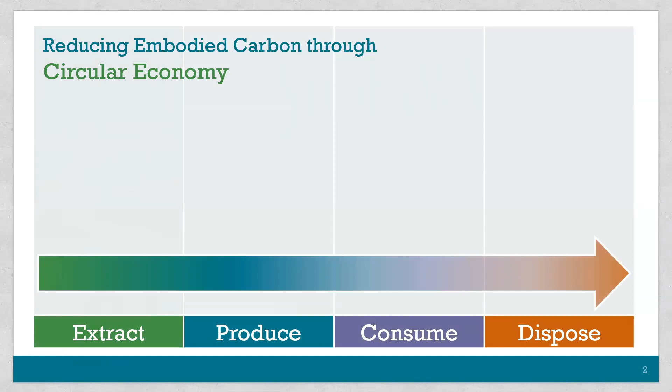So, move my slides. Okay. In a linear economy of take, make, use, and waste, where we're extracting materials, building with them, operating the buildings, and demolishing at end of life, there are carbon emissions all along the lifetime. When we recycle materials, we cut off the phases of demolishing downstream and extraction to some extent upstream. And here we see some avoided embodied carbon emissions.

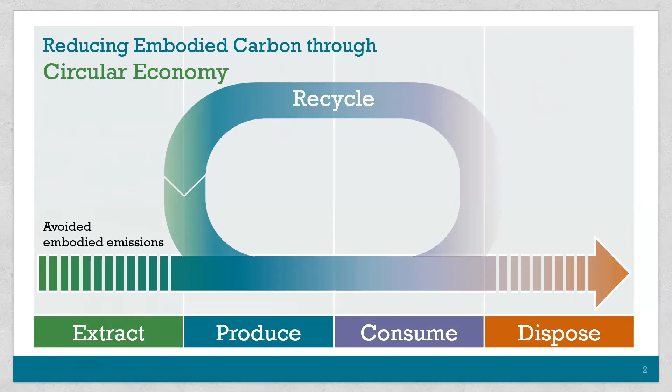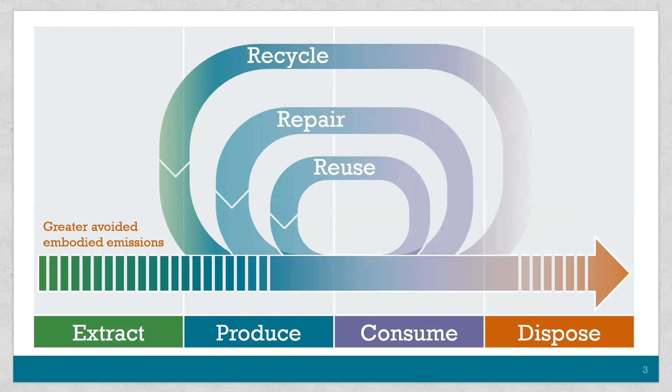In circularity and generally materials management, we talk about higher and better use of materials, keeping them as intact and at their highest economic value as possible. So this means in this diagram, going inward on the concentric circles to repair and reuse. And when we repair or reuse a product without breaking it down into its basic material components for recycling, we see even greater avoided embodied carbon emissions because we avoid some of the production phase of the life cycle emissions. So there is a nexus between circular economy and embodied carbon. The solutions are not always compatible, but there is a lot of overlap.

So I would encourage anyone that's interested in circular economy to really check out the Ellen MacArthur Foundation. They're a global leader, a thought leader in this, and we've been members of their Circular Economy 100 group for 3 years. Here's an example of a resource from the Circular Economy in Cities toolkit. And I'll be pointing out some of these drivers for change that are creating the necessity for circular economy in the built environment as we go through some of these slides.

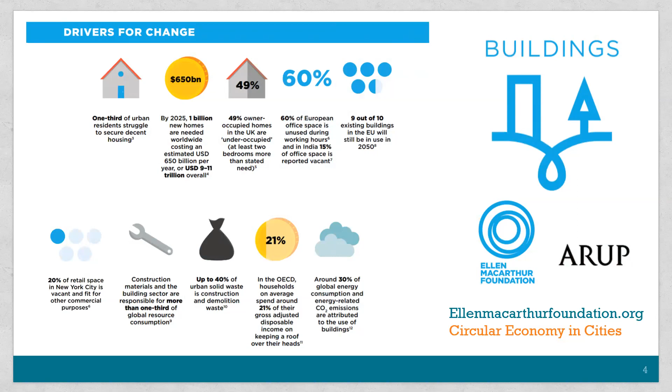So let's look at the transition from today's building material flow to what a more circular material flow might look like. So this is what we have today, basically. The large band across the bottom being mainly a linear throughput of materials, with the loops above representing an effort for C&D recycling and some building renovations that occur naturally.

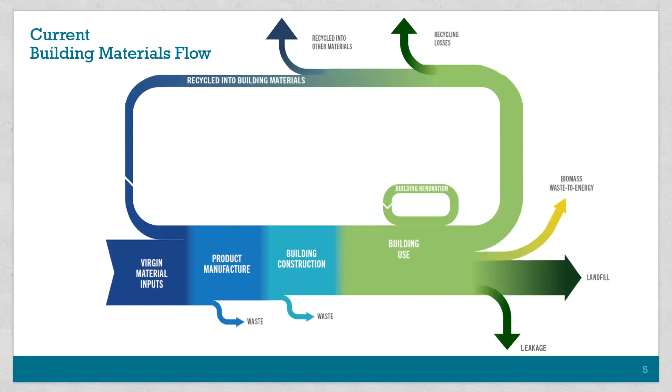Increasing circularity in the built environment means creating more loops and making them thicker, putting more material through those loops. So at the material level, more effective recycling, and moving inward on the circles, disassembling parts for repurposing, refurbishing, modifying to use almost wholly intact, and closer in is salvaging for direct reuse, and also placing a greater emphasis on building renovation and upgrades. Again, with the tighter loops resulting in greater embodied carbon savings by avoiding more processing, manufacturing, and transport.

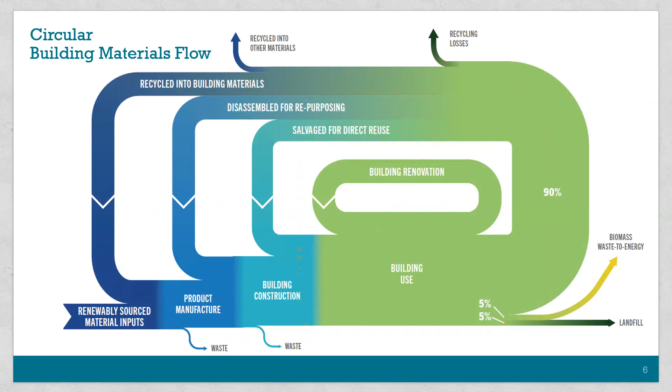So we and our partners at ARUP produced a primer on circularity concepts geared towards local governments, which can also be a good, simple introduction for anyone interested in looking at circularity in the built environment. And in it, we looked at these varying scales at which materials can be reused or used more efficiently. And at each scale, we looked at strategies for A, making the most of what's already existing in the built environment, and B, for designing new construction. First, for material efficiency, which would also reduce upfront embodied carbon, and also for optimal chances at reuse at the building or part's end of life.

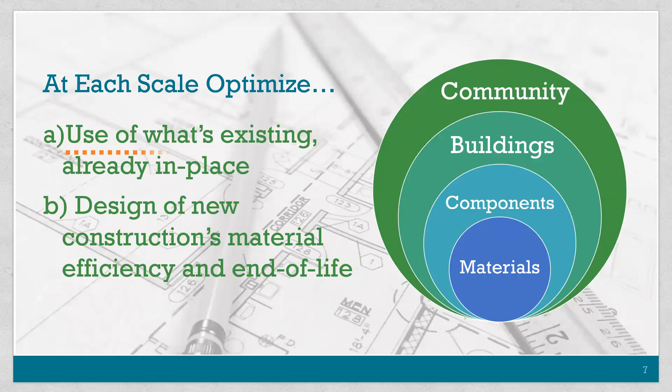This last point, designing for disassembly and a second or third life, does reduce embodied carbon, but in the future, potentially decades from now. So with our immediate focus on embodied carbon now, we're going to limit our conversation today to the first point, using what's already in place.

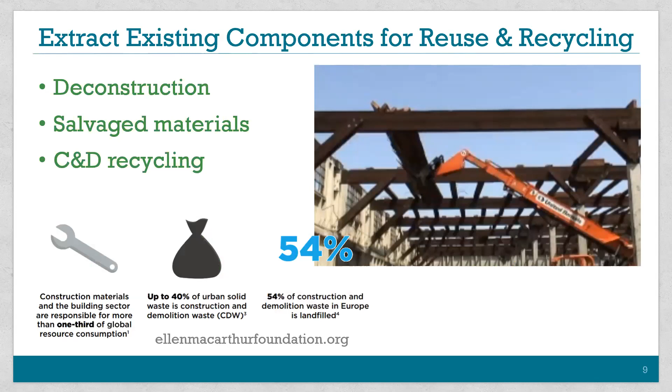So Joe and Andrew will be talking about this scale of reuse today. And then keeping as many of those parts and components intact in the building and extending the life of those parts by reusing the whole building is the next scale of reuse.

At the whole building level, getting the most out of existing buildings can include sharing and increasing occupancy rates of currently underutilized buildings. So some of these statistics we saw from the Ellen MacArthur Foundation report show that there is significant underutilization of existing buildings.

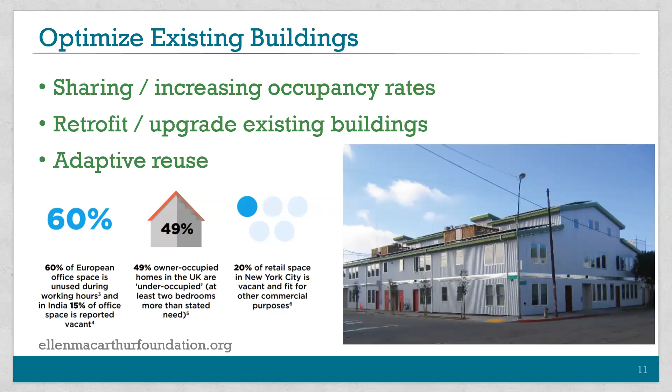And then taking those older buildings and retrofitting them and upgrading them to improve their performance, and also adaptive reuse of existing buildings if the programming of that space needs to change. So this is an example of an old noodle factory turned into affordable multifamily housing here in Oakland. And Larry will be talking about this scale, the building scale of reuse today.

And finally, no building is an island, and especially local governments need to consider how all of the existing buildings and new construction serves the end goals of housing people and jobs at the community scale. And this awareness should also apply to developers and anyone who's really building in a community. How does the placement of individual buildings of what height, type, and building materials affect the overall community's carbon emissions, both operational and embodied carbon?

So this is a question that we at StopWaste are helping cities in the Bay Area start to ask, maybe not yet answer. We're doing this through an interactive planning charrette game. We'll be playing this at the Getting to Zero conference in Oakland on October 11th, and I'm happy to talk about that offline some more.

But some common strategies that are already used to optimize the use of existing city infrastructure and the existing built environment into which a building is added are things like infill development, efficient use of spaces, smaller units, while being careful not to compromise quality of life or cater to a very small segment of demographics. So it's a little bit tricky and you need local government intervention there probably.

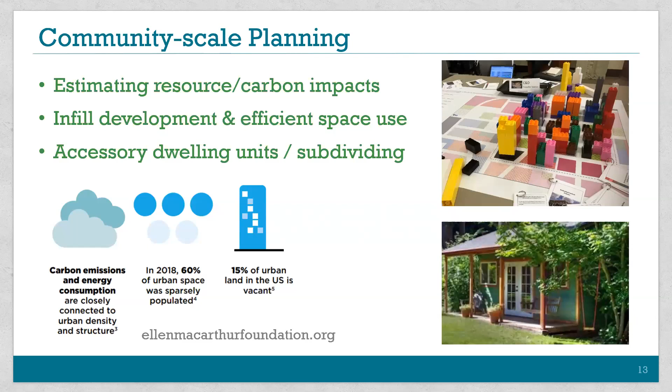But also in the single family space, the emergence and popularity of accessory dwelling units and subdividing larger homes into multiple units. So that's just to set the framework and stage for all of the detailed reuse examples that the rest of the panelists will be speaking about.

And here's a summary of the report that I mentioned that we invite you to use as you like, offer us feedback, but to get the conversation started.

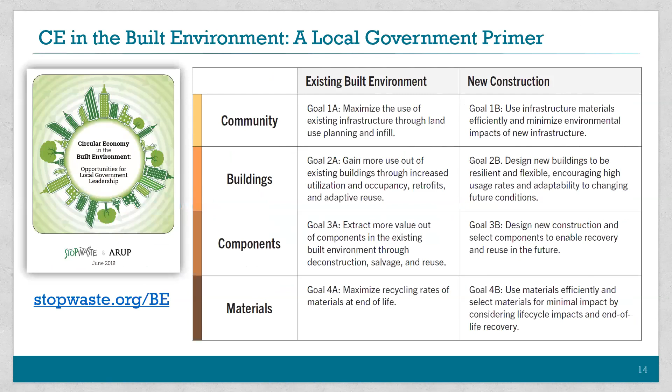Joe has been the executive director of Build Reuse, formerly known as BMRA, which stands for Building Materials Reuse Association, since 2017. Being in the building trades since he was 15 and in reuse nonprofits for the last 20 years, he is a builder at heart.

Since 2000, Joe has been a leader in the reuse industry, first in the Northwest, where he helped launch several local reuse groups in Portland, Oregon, and served on the City of Portland's Deconstruction Advisory Group to pass the nation's first deconstruction ordinance. Then nationally with Habitat for Humanity through his work on the National ReStore Committee.

Joe helped build the Portland Habitat ReStores into one of the nation's top 5 ReStores in revenue and net profit. Since joining the BMRA, he has been revising and refocusing the organization to align building reuse with other industries in the sustainable materials management industry and continue to heighten the awareness of reuse and deconstruction.

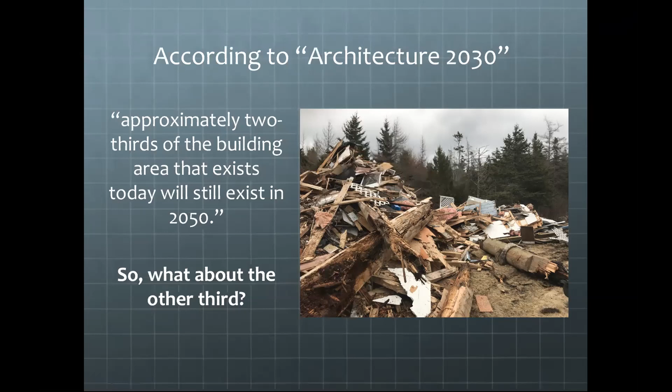According to Architecture 2030, we have a lot of buildings that are going to be coming down over the next 30, 40 years, 1/3 of them. So my big question there is, what about the other third? And what happens when we take these buildings down? We're also hearing that the global building stock is going to double in area by 2060.

This is the equivalent of adding an entire New York City every month for 40 years.

So we've come a long way. It's always a good reminder to me of, one, where we've come from, and two, how much more we have to do. But my basic question here, and I'm preaching to the choir, is where will all of these materials come from?

They're going to come from natural resources if they're not reused. There's an incredible amount of wealth in the material values within our buildings that are going to be coming down. If we destroy those materials, they go to waste, and we take new natural resources.

The key there is the wealth in the present materials, and that's where the community aspect, in my mind, comes in. Because as we destroy that wealth, as we waste that material, we are depriving our communities of that inherent embodied wealth that's within those materials.

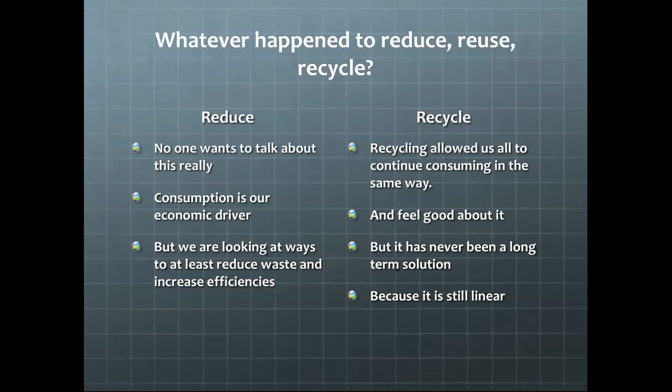Now, what about that reuse component in buildings? Why is this important? I think it goes back - I forgot to start my timer, Mia, so cut me off if need be - to the communities, and why it's important.

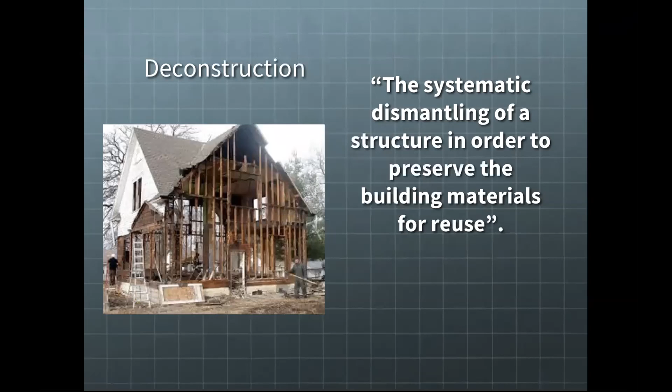Deconstruction is the systematic dismantling of buildings to preserve materials for reuse. Where those materials go is the important part from a community point of view - they come back into the community and create jobs. Deconstruction creates 7 jobs for every 1 job in demolition, and those jobs are typically entry-level positions.

A lot of the people that start in those jobs, like you see in this slide, can go on to other jobs within construction. I like to use the phrase that if you know how to take a building apart, that's a really good intro to putting a building together.

We usually look at it the other way, but this group of folks came to us, came to our trainings, with no experience. They're taught how to take a building apart, and by the time they get a couple years of experience, they can get work in other trades. So it's a very good entry-level position.

So job creation is a huge factor for a lot of communities. When you're looking especially at blighted communities, as buildings are coming down and being destroyed and that material is being wasted, there could be 7 more jobs created for every 1 job tearing those buildings down, especially in blighted communities where there are underserved populations that need employment.

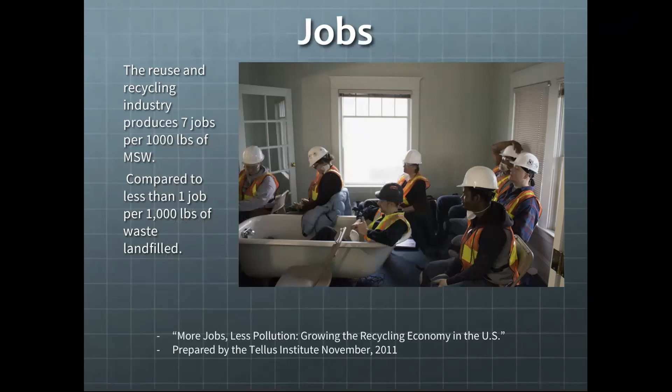It's a huge waste. These workers will be working within their community to take those resources back into the community, typically into reuse centers - that's where most of the materials go. They also go to higher-end material reuses, but a lot of the materials that get reused into the system go through local community centers like this one. It's unmeasured, the thousands of jobs created through that. The stores in Portland that I worked with had 70 employees working in 4 stores.

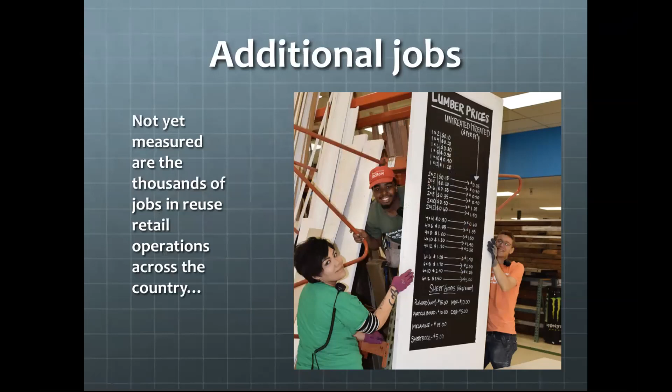And that's just one small city. The potential for creating reuse centers is immeasurable right now. The more buildings come down, the more materials are reused and focused through these reuse centers, the more jobs we can create, to the benefit of our communities. The other advantage with those materials is that most of these reuse centers support needs-based people in the communities who are able to buy these materials at serious discounts to repair and rehabilitate their homes. So there's a huge benefit there as well.

So what's up in our industry as we talk about deconstruction and reuse? It's amazing. When I started this work 15 years ago, the words were unheard. There was no conversation around it. Now we're talking with cities, and this is just a short list of the cities we're talking with now, but communities everywhere are starting to look at deconstruction and reuse as tools for community development within their city. Ways to address blight, economic gentrification, weatherization issues - different topics like that are being addressed through embracing deconstruction and reuse to get those materials and that material wealth back into the communities.

We've got some challenges, I'll just spend a second here. We're a small industry, where recycling was 25 years ago. We need to grow, we need to expand. The systems that allowed recycling to grow exponentially the way it did, and with the speed in which it did, was because it was able to still work on that linear model that Mia outlined earlier. Reuse is a much tighter circular system, and it's going to require different systems. So as you look at that within your communities, within your businesses, you have to look at models and systems that will move larger amounts of larger materials. How we do that effectively is the key challenge to our industry right now.

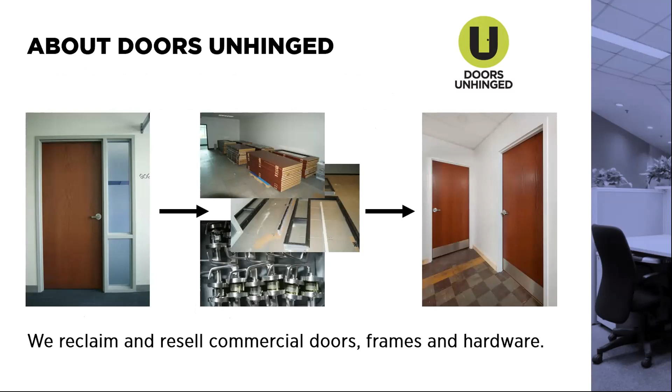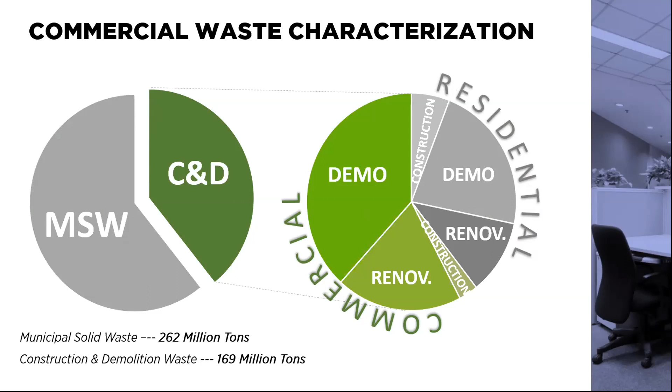And so renovation is going to be materials that are coming out of buildings without the building coming down. So that's when an office space gets turned over and all the materials get taken out to the dumpster and tossed in a landfill. That 32 million tons is, to us, our golden opportunity. Whereas something like core shell waste often is going to consist of concrete, masonry, steel, brick, glass, what have you, some roofing maybe. Those items are really, in a lot of ways, better suited for recycling, just in the nature of being able to take things apart and put them back together.

I think there is some great reuse happening, and I love some of the slides that Mia was showing of systematically seeing structural steel being taken down. I think that's awesome. Sometimes these buildings are so old they can be obsolete.

However, the tenant waste, or commercial interior waste, however you want to look at it, is a different story. These materials often come out after the build out could be as little as 3 or 5 years, but often around 15 years. Sometimes they're brand new. They tend to go into the building as modular individual pieces, not necessarily highly customized, pretty standardized in their construction and how they're produced. And I'd argue a lot of the materials coming out are going to look a lot like the materials going into the next project. So what a great opportunity we have to really close this loop.

To me, there's so much potential here, and this is why I launched a business in this space. To us, commercial material reuse is really taking materials out of commercial buildings and putting them back into commercial buildings.

A lot of talk these days is about construction waste management and zero waste, and that's great, but it's not talking about where those materials end up. And if they end up in some mixed recycling stream, I'm less fond of that. I think there's a lot of benefit, as Mia and Joe have spoken to, about reusing those materials and tightening that circle in that loop.

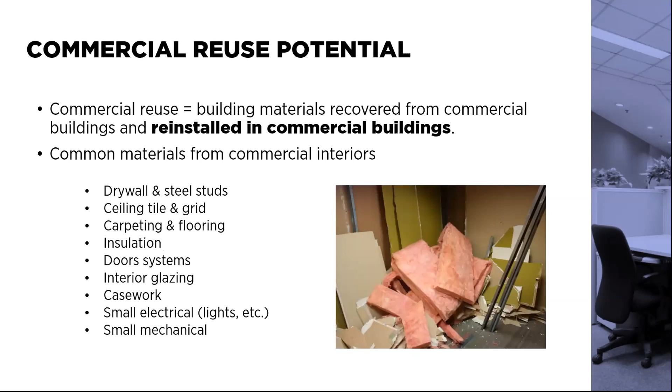These are some common materials you would see in commercial interior projects. The majority of the waste is going to come out of drywall and steel studs, followed by ceiling tile, carpeting, and it goes down the list. Door systems are in there too. A lot of these materials, again, are highly reusable and, in my opinion, highly valuable.

Looking at the carbon side of this, I first want to thank the Carbon Leadership Forum and all the people that helped out with their really formative studies: the benchmark study that looked at the whole building life cycle assessment and the embodied carbon within that, and then the subsequent studies for tenant interiors and for mechanical, electrical, and plumbing. This is great work, and we've crunched this data a little bit.

When a building is initially built, you're going to see that the majority of the embodied carbon rests in the core and shell, and that makes a lot of sense. However, tenant spaces turn over much more regularly than the whole building. So over time, as renovations happen, your carbon is starting to pile up. And naturally, so are the materials, right? We're tearing all those materials out, throwing them in the landfill, getting new materials and bringing them in.

So by the end of the lifetime, these numbers are very approximated in a lot of ways, but we're seeing that the interiors actually provide pretty stiff competition for the embodied carbon as compared to the core and shell.

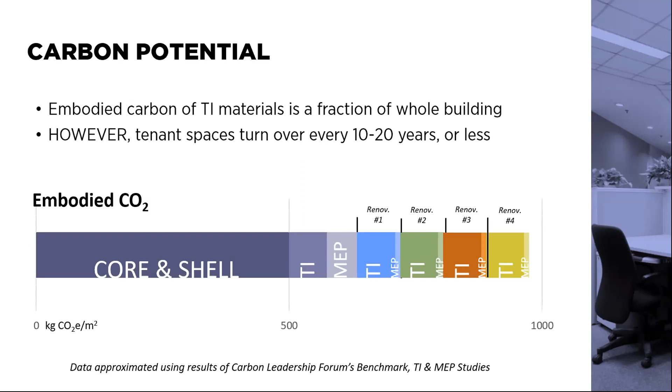Looking at this another way, we took the data out of the Carbon Leadership Forum's tenant interior study and really wanted to understand how widespread certain materials were, trying to identify what the best candidates are for reuse if we wanted to maximize the embodied carbon we're capturing back.

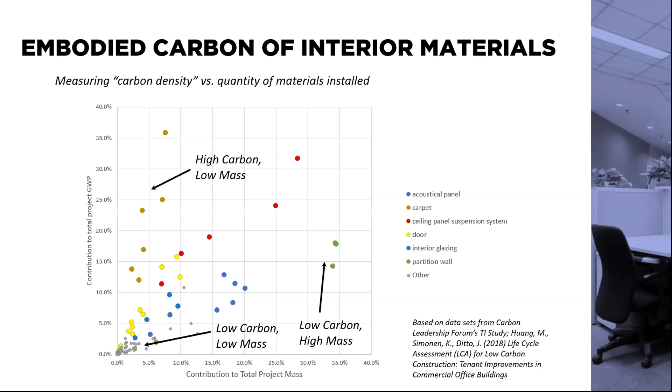So this has been the basis for how we're thinking about this. If we do go look at it pound for pound, and go through various materials, I've still stuck with a lot of the same materials, and you understand my bent towards doors. So there are a lot of materials geared towards doors in here.

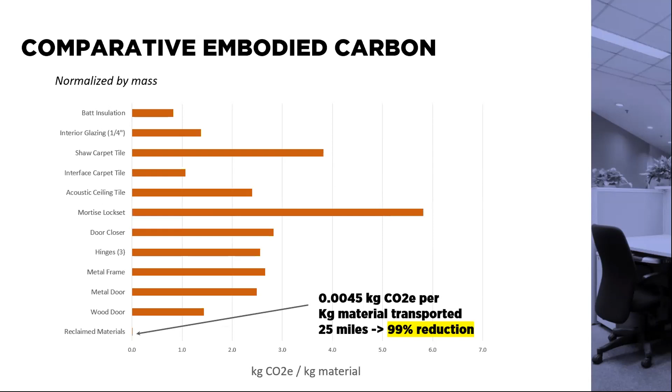If we compare that to a reclaimed material, pound for pound, reclaimed wins every single time, right? Over 99% reduction in embodied carbon, which makes sense, right? Because all we're doing is taking it out of the building, putting it on a truck, and sending it to a warehouse, hopefully not that far away. This is comparing essentially just the manufacturing process. If you're a life cycle person, that's LCA, stage A1 through A3. So there's huge carbon benefits from this. I mean, it's extraordinary.

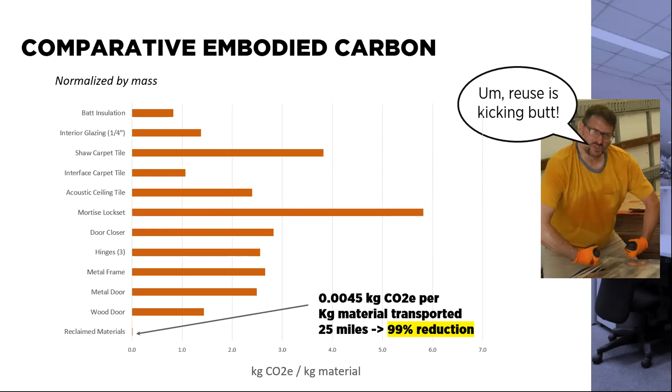Joe mentioned, rightly so, all the great work happening in community reuse centers. We see a lot of that being based around the residential marketplace, where you have homeowners and artists and hobbyists that like to find a really great deal or something so special and unique that came out of a building with a great story around it. That's fantastic stuff, right? And these centers often end up looking kind of like a Home Depot of reused materials, right? Really cool, interesting things you can wander through, throw some things in your cart, check out, and take it home.

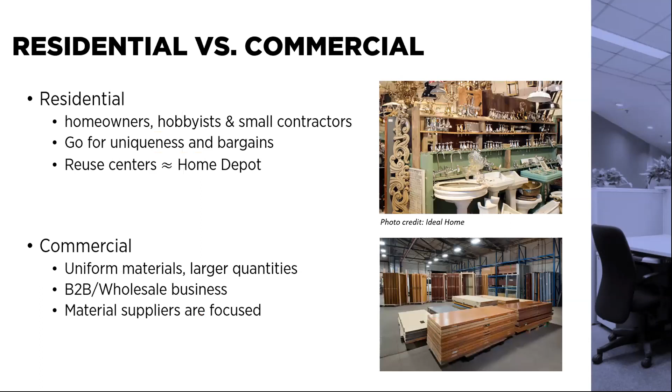That's great. There's so many great centers around the country. We're seeing less work in the commercial space though. Part of that is commercial reuse is going to look very different. We're going to see larger quantities of materials that are very similar. We don't really have that warehouse environment you come in and wander around. It's really more of a wholesale B2B business where we're working with contractors, architects, developers, and maybe tenants to identify which materials can fit into their project. And similar to the way the industry works, material suppliers tend to be very focused. They're not Home Depots supplying drywall and doors and lighting and ceilings. Everyone is a different one. You have a door supplier, a lighting supplier, a flooring supplier, a ceiling supplier. They're very focused and understand their industry really well.

We see a huge amount of opportunity in the commercial reuse sector, which is why we launched Doors Unhinged. There's so much material out there. Again, that 32 million tons coming out every year, which has a lot of economic value still in it. Some of these materials, you wouldn't even know they're used, honestly. The other part of that is new materials going into commercial projects are expensive per square foot. They're much higher than residential. And why that's important is if you have an expensive material, and then you give someone a really good deal on it for buying it reclaimed, you still have a reasonable margin to capture that material and essentially run a business around that. That's the way we can really get a lot of throughput, because we have some decent margin.

These materials, again, are going to be fairly similar. A lot of doors are 3 foot wide by 7 foot tall. Ceiling tiles come in 2 foot squares or 2 by 4. There's a lot of uniformity baked into this whole sector, so we can take advantage of that. Spaces also turn over very quickly, so there's a steady flow of material, and room and also the need to specialize into specific areas or material types.

Challenges, of course there are challenges. There are lots of them. Lots of material that can become a problem. I know firsthand, you open the tap a little bit and it can be like drinking from the fire hose sometimes. There's so much material that can come at you, it can be overwhelming. One of the largest challenges we deal with is working with architects and designers to incorporate reclaimed materials. And oftentimes they just don't necessarily want to move away from the specific design they had, and the very attachment they may have to a specific finish, size, whatever.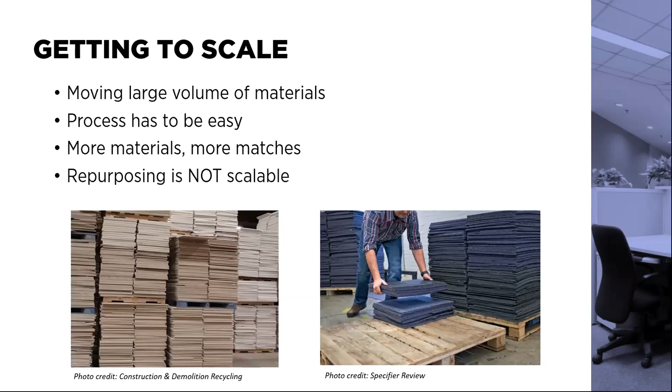All right, so using a little bit of math and that same information from the Carbon Leadership Forum TI study, some data out there says that there's about 400 million square feet of commercial office space built each year. That's interiors, not new, brand new ground-up construction. So here's the ambitious goal I'm setting out: if we hit 50% of the square footage of that new space going in and have them use 50% reclaimed materials, what's the carbon impact of that? You go through all the conversions and the math, and it comes out to almost 21 megatons of CO2 avoided by 2050. And that's just in the US.

We don't have the ability—we know there's a huge amount of space globally, and looking in other areas, we don't have the capability to do those numbers. I'm sure someone can. If you know this, I would love to talk to you.

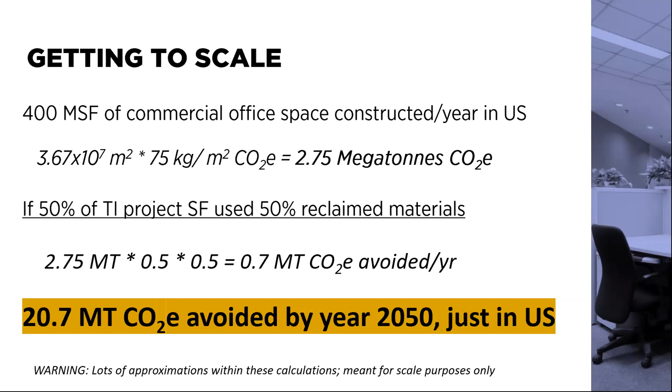So how are we gonna get there? How are we gonna hit 50% material reuse? Okay, well, this is what you'd consider a pretty traditional circular economy approach.

Instead of the linear approach, we're gonna close the loop here and capture those materials. I don't believe on its own this is gonna work, where you just look at the people you get material from behind you and sell the materials to your customers in front of you. There needs to be more than that. Honestly, what we need is a central nervous system—really a platform that allows information to flow about what is where, what's coming out, who's involved, what's gonna happen, how much it's gonna cost.

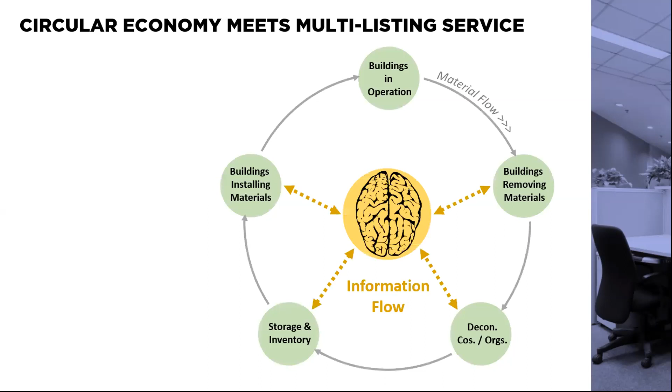All this material, really—what I compare it to is essentially the multi-listing service that real estate brokers use for residential real estate. You have all these competing brokers that share one central platform. The brokers are a key part of this. Imagine all these material reuse brokers working with this platform, working with individual customers, working with decon companies and reuse organizations to make sure you get this material flow that's as efficient as possible and gets the right materials from the people who have materials to the people who are buying materials.

And just think about all of the new enterprises that could pop up, that could build around this platform, all the jobs that are created—as Joe mentioned, how much more we get from a job in deconstruction than we do from a job in landfilling. So that's my pitch.

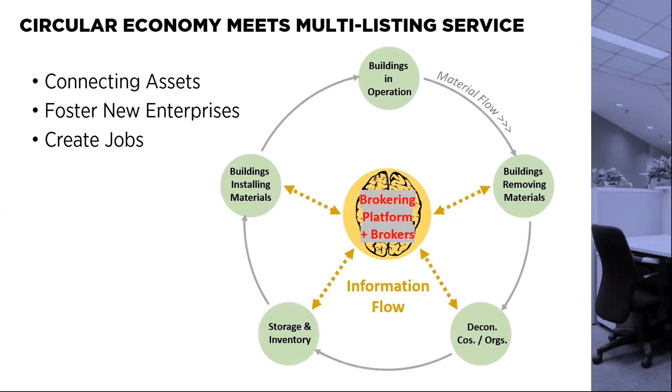Quickly in summary, there's so much material out there. There's legitimate and significant carbon benefits to it. It's a tough industry, but we just think we need to build the right enterprises that reflect how the industry works. And let's get ourselves together and organize the infrastructure to make this all happen.

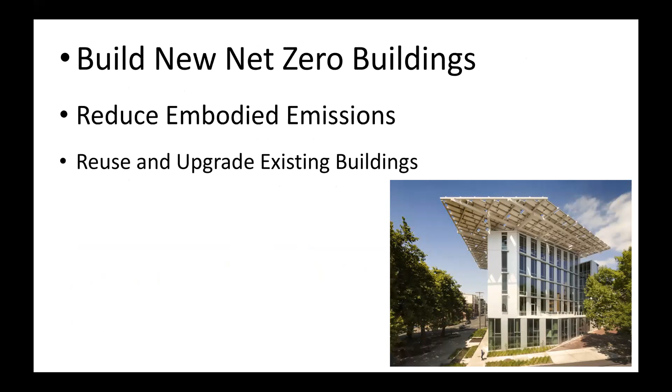And that the use and waste of materials has a huge impact on natural resources, on our communities, and carbon emissions. So I'm going to talk about this at the whole building scale and focus on carbon opportunities of reuse. So this is the way we currently think about getting to zero in the architecture profession. We think about building nice new net zero buildings. We're starting to think about reducing embodied emissions, and we're sort of thinking about reuse and upgrade, but not very seriously. And I think we have it backwards, and I'm going to tell you why.

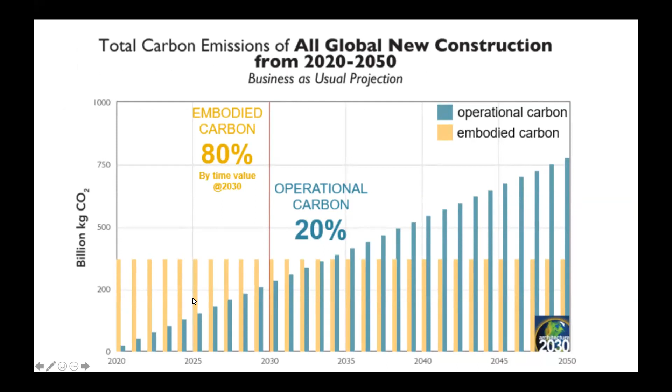So let's start with new buildings. So this is a slide from Architecture 2030 that just sort of shows the impact between now and 2050 of embodied emissions, which are the yellow lines, and the operating emissions, which go up. If we build the same amount every year, which is what we're projected to do, about 80% of emissions from new buildings will be embodied carbon. So with new buildings, we really need to be focusing on the embodied impacts.

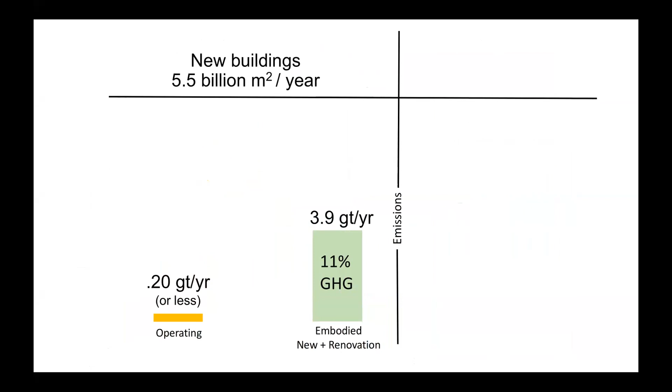All right, so on an annual basis, it looks like this. New buildings, to build them is about 11% of our global emissions. To operate those new buildings is less than 1% of adding operating emissions each year. So embodied emissions are where we need to focus with new construction. But there's another thing, which is that the existing buildings are sitting around emitting about 28% of our greenhouse gas emissions just from operating them all.

So there's a couple of reasons we need to think about existing buildings. One is to not build so many new buildings by reusing more, and two is to try and make them more efficient. So I'm going to go off topic a little bit and talk about operational carbon as well, because I think they really tie together.

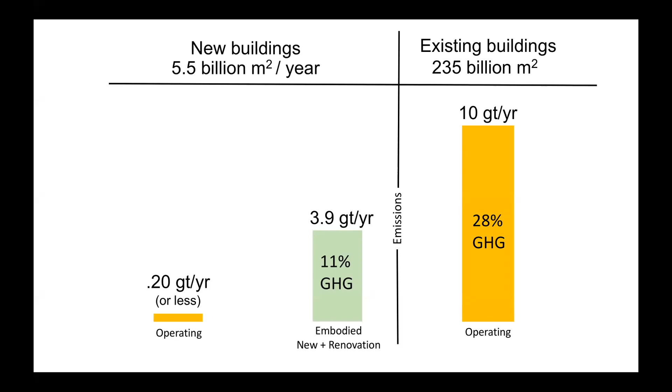So to me, there's this huge opportunity to say, if we could reuse more of the buildings in those countries, we could maybe build fewer new buildings, and both those numbers then come down. We're avoiding embodied emissions by building fewer, and we're upgrading our existing buildings and lowering the carbon of that.

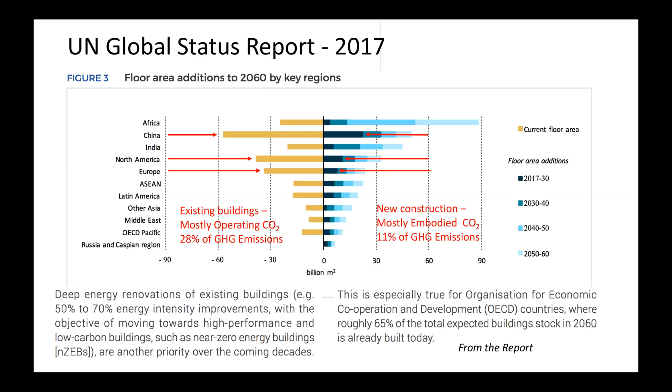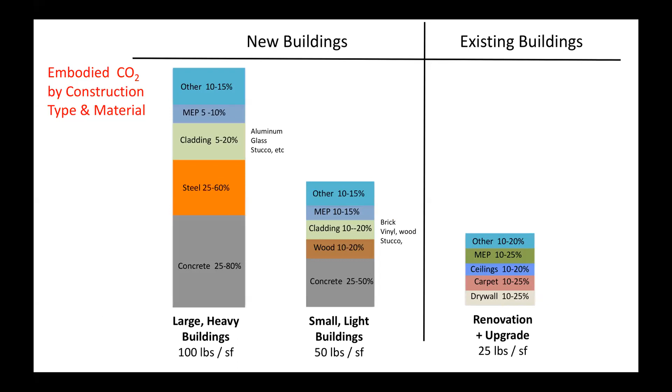But the real savings is when you get into renovating existing buildings, you're going to spend less than a quarter of that typically, because you're not dealing with the foundations and the structural system. You're dealing with interiors, MEP systems, and you're basically taking a building and putting much less investment into embodied carbon. So it's much lower.

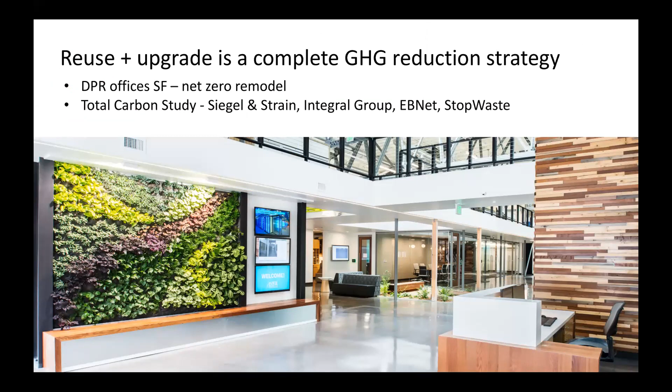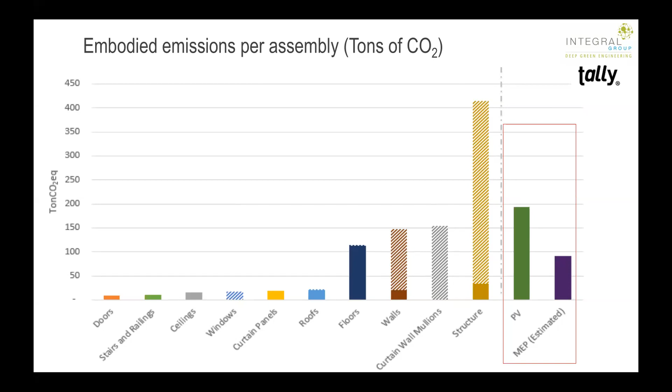And it resulted in about a 70% reduction in CO2 emissions by reusing the building and investing a little bit in the remodel. What this didn't initially do, it didn't count the PVs and the MEP systems, because Tally at that point didn't have that in their database. So we estimated those on our own, and that about doubled our embodied carbon footprint for this remodel. The good news was that those PVs will pay for their carbon debt in about 4 years by making it net zero.

So the bottom line to this slide is that we have to do both: we have to save embodied carbon, and we have to save operational carbon. And if we reuse buildings without doing the energy upgrades, we're missing this huge opportunity.

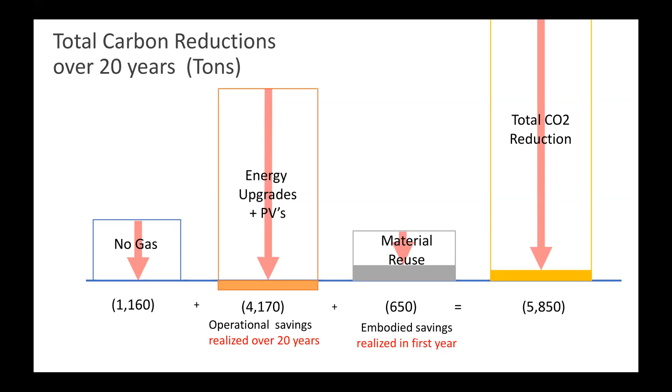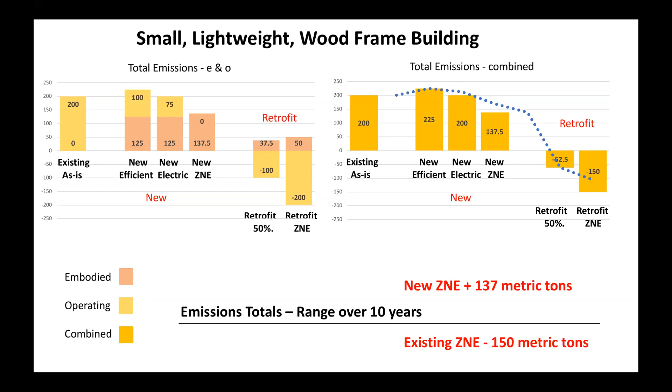So on the right-hand side, you can see the cumulative. When you add these two together, you can go from just building a new efficient building, which is going to be worse than leaving the existing building as it was, all the way down to a retrofit to net zero. You're saving 150 tons of carbon by reusing and retrofitting that building. So there's opportunities both from embodied carbon and from operational carbon. This is a lightweight wood building.

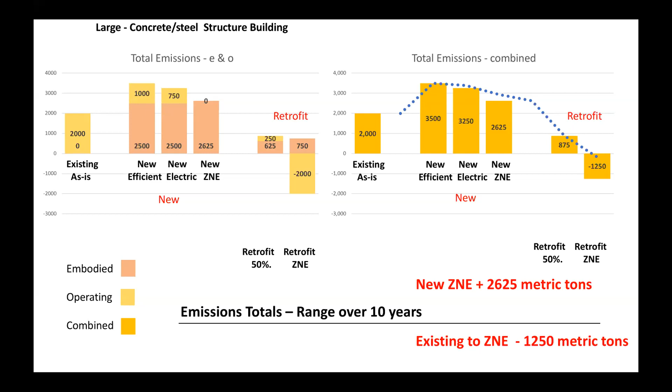If you look at a heavy building, it's the same kind of curve, but the numbers are much bigger. So the potential for savings is now 1,250 metric tons, because the operational energy and the embodied carbon is so much greater. So you get much bigger savings. This is a 50,000 square foot concrete or steel building. The other one was a 5,000 square foot wood building. So there's a huge opportunity to retrofit and to reuse, and we have to start doing it all.

So reusing and upgrading accomplishes two things. We lower embodied carbon by reusing the building compared to building a new one, and we lower operating carbon by taking an existing inefficient building and making it way more efficient.

They provided shade and glare control. They improved daylighting, lowered energy loads, and it allowed the building to upgrade to radiant heating and cooling, which improved occupant comfort. It uses 55% less energy than the existing building did, and it freed up 31,000 square feet of rentable space that was dedicated to mechanical floors that now went away.

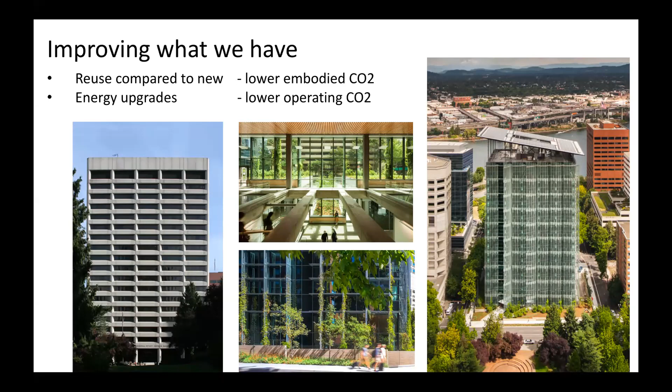So it was an amazing retrofit and remodel of a large existing building, saved them a lot of things. They did not do an embodied carbon analysis of the project, which would have been very instructive, but I still think they probably made a very good choice.

So basically, I think our priorities are backwards. We need to start by reusing and upgrading, and I'm going to put upgrading in all my reuse ideas from now on, because that's doubling your opportunity. We also need to reduce embodied emissions, and we need to build new net zero buildings. All our new buildings should be net zero, but we've got the priorities backwards.